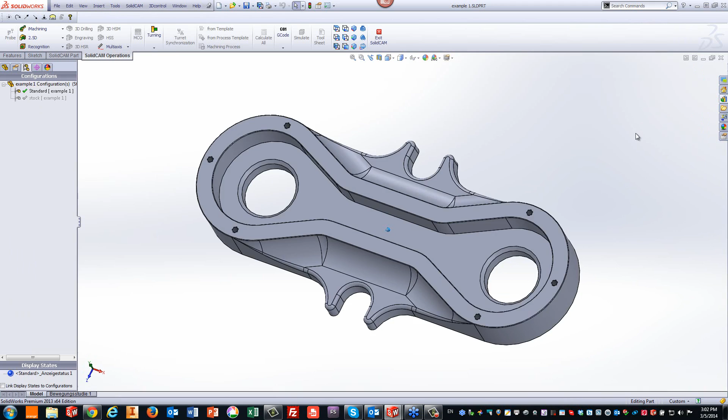Okay, so let's get started now with the webinar itself. As I said, we're going to be starting off with this part as shown on the screen. And as you can see, the part is basically one that has to be machined from one direction, only from the top over here. There's nothing to be really done on the side. But as you can see also, there's this area over here, which is really a simple pocket area of itself. And we have a regular profile on the outside. But you'll note that we have areas such as this over here, and also symmetrically on the other side as well, areas that need to be really done using HSS.

Now, besides the part itself, I'll also be using a fixture, or I should say I'll be using a vise that looks like this. This is the vise I'll be using, and I'll be putting that into my setup as we go further on in the part itself. Okay, so let's get the part back on our screen, and let's actually start our process. Now, I've created this part already with a configuration of stock as shown over here, and I actually like working with configuration stock rather than automatic stock, because this way I can make my vise associative to this stock itself.

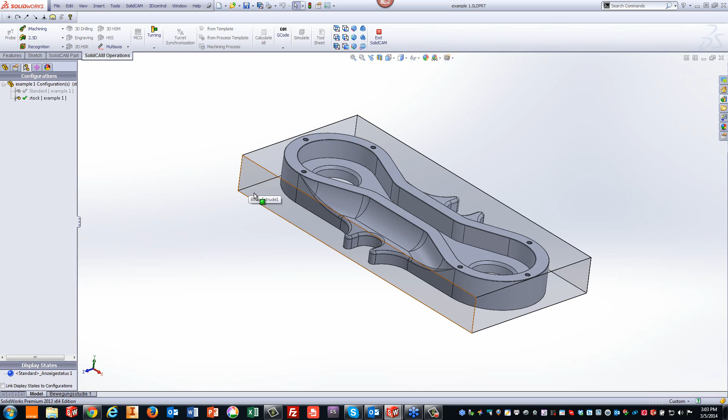Okay, let's start by going to SolidCAM, new milling. As you can see, we've opened up the windows, and this is the part that we'll be using. I'll just click on OK to start the process. I have my machine here, and I'll be creating a home position. In this particular case, I'm going to click on the top, and my home position, on purpose, I'm keeping at the corner of the part. Normally when I do the webinars, everyone always sees me put the home position in the middle. This time I want to actually put it at the end, to show that it can be done this way as well. Okay, my home position is over here. We're all set. That's all I need is just this one home position, and we're done with that.

Next thing I like to do is create my stock. So I'll go into stock. And since I have it as a 3D model, I'll just change my define by from box to 3D model. And I'll change my configuration to my stock, and just click on that to get my stock defined. If I click on show, you can see that that is my actual stock, as we'll see during our simulation. Okay, we're all set. My target I don't have to do because in my settings of SolidCAM, I have it set already that my target is done automatically. If I were to click on this, you'll see that my target has already been picked, so I don't really have to do anything over there.

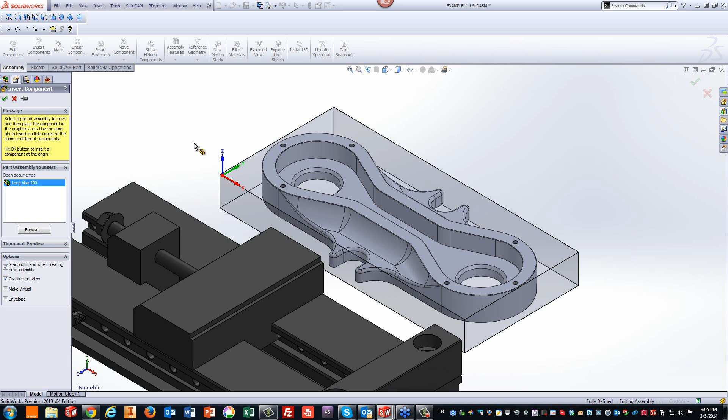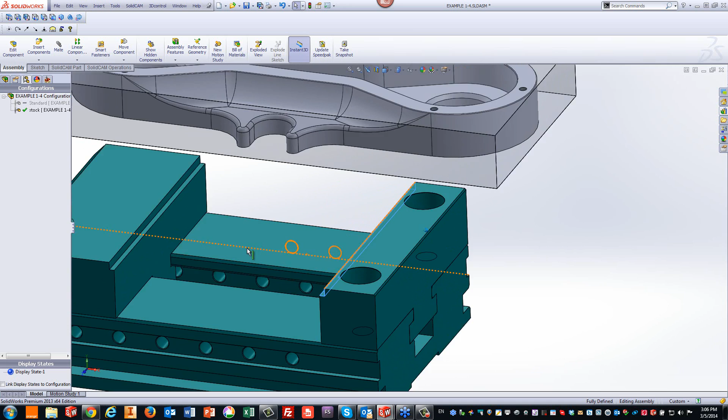Now, since my vise is already open, it appears in the list over here, and I'll just put it down over here. Now, in this particular case, I already did homework and I checked that the width of the stock itself is the same as the distance between this surface over here and this surface over here. They're both the same length. I did my homework and I checked it out.

And in case it wasn't, with this vise that I have over here, we just go into my tree, open up my vise, the entire assembly over here. In this particular case, in my mates, I have my measurement over here. All I had to do was change that and everything will be set exactly according to the width that I have over here. But this is all set, all good and well.

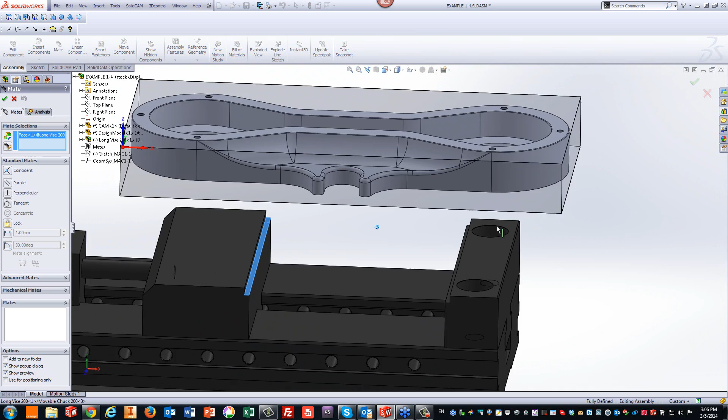Now let's just do some mates. I'll click on mate and I'll start off by clicking on the bottom surface over here where I want the stock to sit on, and I'll click on the bottom surface of the stock, and as you can see, it's coincident over there. Next, I'll click on this side of the stock together with this side of my vise, and that's coincident over there as well.

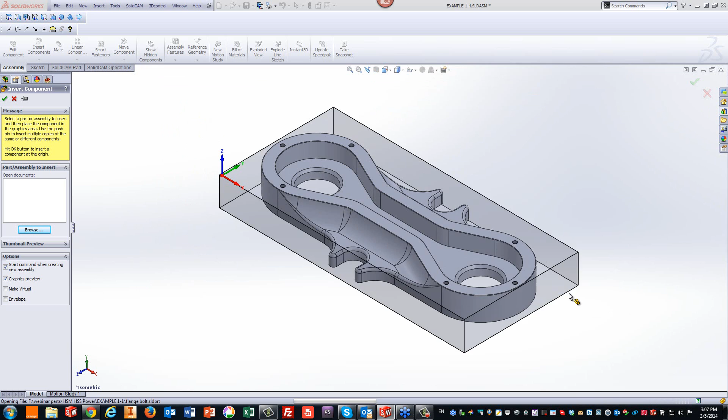Now, I'd like to have my vise, sorry, let's undo that. Let's do undo. There we go. Let's start this again. I made a little mistake of my own. I'm only human. Okay. Let's do file. Let's do mate. Sorry, my mistake again. There we go. Insert component. We'll do browse. I have my vise over here. All set. And we'll just go this quickly.

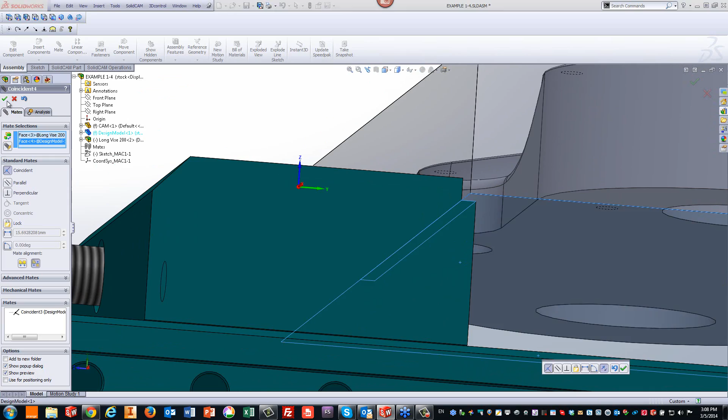I'll do my mating. This to this surface over here. I'll do this surface to this surface over here. And since I want this sitting in the middle, I like working where I have planes already in the middle of my part and in the middle of the vise. So all I have to do is match those planes.

So in this particular case, my long vise, I'll take my front surface as shown over here, and in my CAM part, in my design model, I'll take this surface, there we go, this surface which goes through the middle over there, and we're all set. We're all mated up as far as that goes.

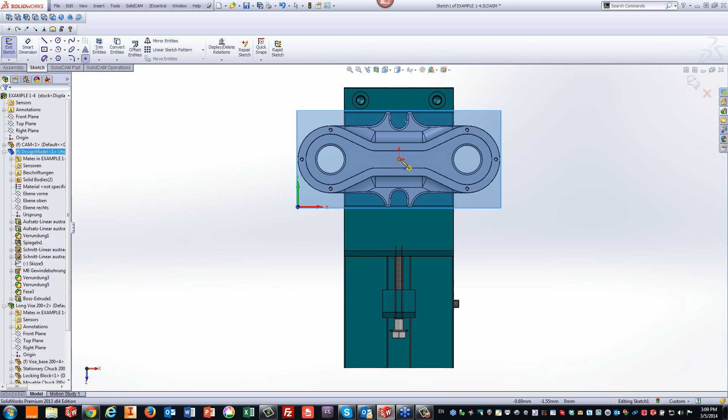Now, one more thing I like to do that'll help me out a little later on. Note my home position is in the corner over here. I'd like to actually make a little bit of a sketch over here. And in my sketch, I'll just put a point exactly in the middle of the part. And I'm going to use that for further reference a little later on.

Okay. Now, since I've mated my vise to my stock, I also want to have this in the same configuration, so this way when I turn off my stock configuration, I won't get any errors from SolidWorks as far as the vise itself goes. So I'll right click on my vise, go into configure components, and in my standard mode, I'm just going to suppress my vise. So now if I go into standard, you see we have no vise. With the stock there, the vise is available. Okay.

Now let's go and do our machine setup. Now we have to define our fixture first. Normally I would do this going to fixture and creating and defining the fixture, but we can also do this inside the option of machine setup. So I'll right click on operation, go directly to machine setup. And as you see over here, it says fixture and it says none. But if I click in this area and click on the arrow, I can actually go to define a fixture at this point over here.

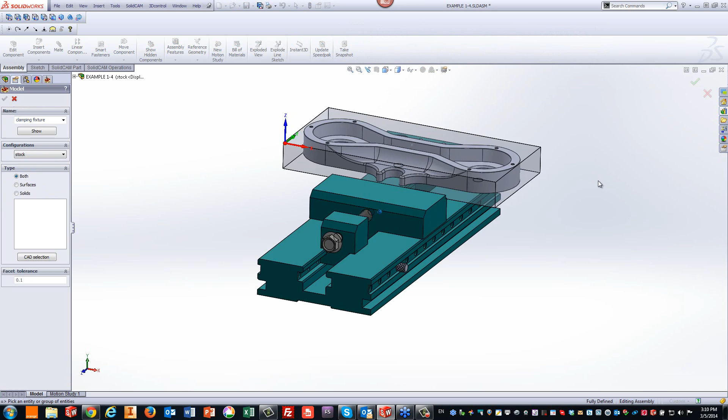Now, to define this fixture, since it's an assembly, it has several different components in it. Instead of clicking on each one of the components, I'm going to use the option of CAD selection to make it a little easier for me.

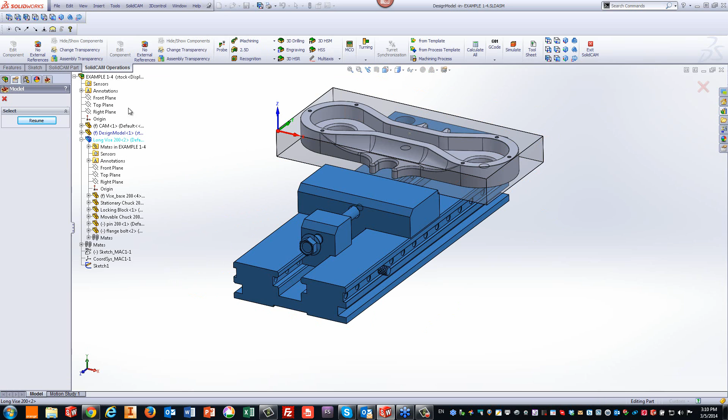In CAD selection, I'll go into my CAD tree and click on the vise itself, then click on resume, as if I picked the entire vise assembly. Note that all of the components are now listed in my fixture. If I click on show, you'll be able to see that everything was chosen, and we'll accept that.

Now what we have to do is set our X, Y, and Z towards the machine. X and Y cannot be 0 because 0 would make the home position exactly in the center of the machine, and I want the center of the part to be in the center. So remember, I created that little point exactly in the center of the part itself, and I'm going to use that to my advantage now.

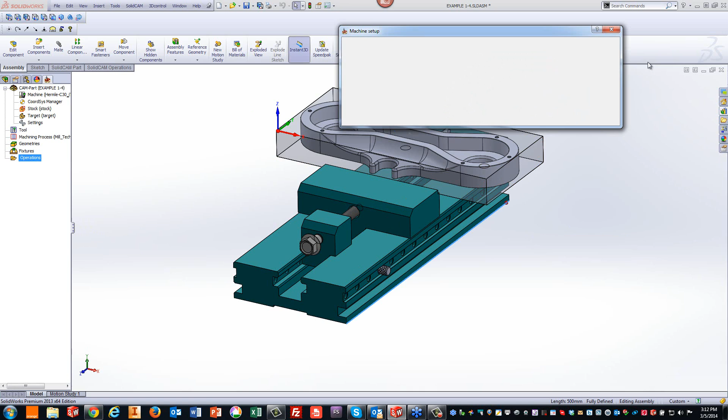I'll right click over here on X, and choose pick X, Y, Z. All I'll do is click on that point itself and accept that. So right now my X and Y are correct. I still need my Z, because my Z is really at the bottom. So I'll right click here, pick Z, and just pick on any edge of the bottom of the vise itself, and that's all set. As you can see, we get the dimensions that we need here automatically.

Okay, now I'm ready to start working. The first thing I'd like to do is a face mill operation along the top of the part itself. Remember the width of the stock itself is 174 millimeters.

So we're going to start by doing a SolidCAM operation of face. When I go into my geometry, and go to base geometry, since I'm using a model, I can click on the arrow and I have my stock here. That's exactly where I want my borders to be based on, my stock. Our geometry is done. Next tool.

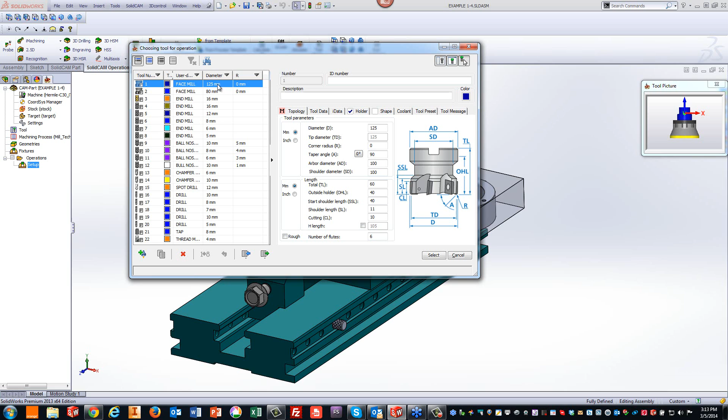Now, the way I like to work is that my machine is already attached to a tool table. So when I go into select, I have already a list of all different types of tools that I work with very often. In this case, I want to start off with a face mill. I'll choose the bigger face mill that I have, the 125 millimeter face mill, that's the biggest one I have. Okay, I'll click on select.

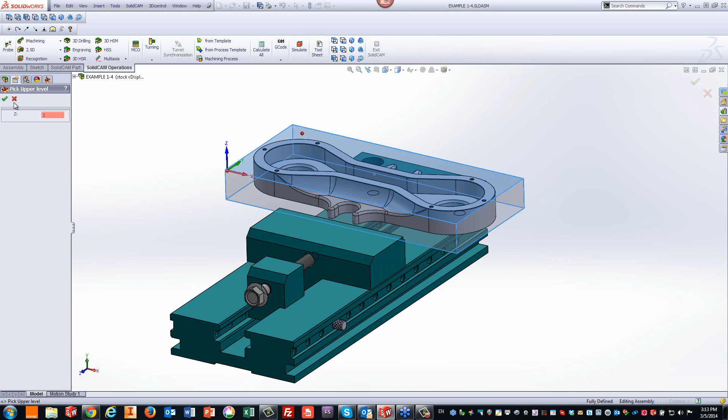Obviously, 125 millimeters is not big enough to do this in one pass, so we're going to be working on this in a hatch fashion over the part itself. Our levels: my upper level will be the top surface as shown over there, and my face depth will be up until this surface over here of the part. I'll just click on the corner, this way it's associative to the part itself.

Now let's go into our technology field. In our technology field, what we have here is as follows. First of all, we have hatch, which is the way I want to work. Now, we also have our floor offset. I'm going to actually leave a bit of a floor offset of 0.2 millimeters and do a finish. This way we have a nice smooth finish on the floor itself.

Next, we have our overlap. Now, I don't want to have a 30% overlap, that's kind of a large amount. If I go into value, all I really want to have is just a 10 millimeter overlap of the tool itself. That's fine. Now let's actually go into the parameters of hatch itself.

I'm going to leave everything the way it is except for one thing, my cutting direction. I would like to work one way over the part. Perfectly acceptable, that's the way I prefer. If you prefer a zigzag, it's fine, but I prefer one way, going always in one direction.

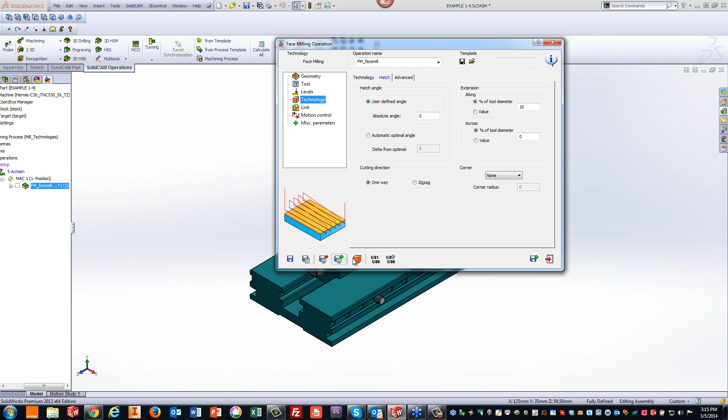Let's save that and run my simulation. Let me run my simulation at this moment, just this time, using machine simulation. The reason why I'm doing this right now in the machine simulation is just to show you that the way I did my machine setup, you'll actually see the fixture and part sitting exactly in the middle of the table itself, exactly where I needed to be.

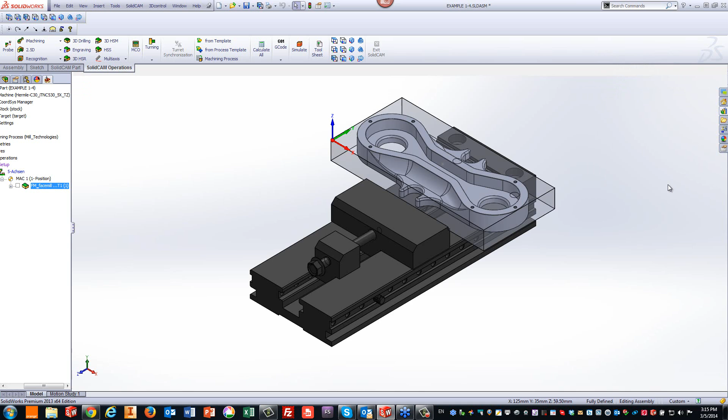All right, so we'll start our simulation. You can see the tool goes down one direction, goes back up, then goes down again in one direction, and now it finished off everything over here. Okay, that was my first operation. Now I'd like to continue on the part, and deal away with all of the excess material that's here.

Now let's basically do a rough cut. The quickest way for me to do it right now is by using HSR, and we'll see exactly the options I'm going to be using in order to do this in HSR.

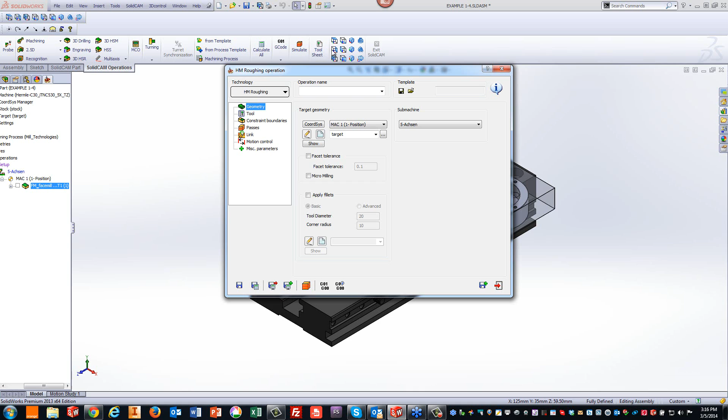So we'll do 3D HSR, click on that. I'm going to use the option of HM roughing. With HM roughing, this is actually probably the best way to do a part where you have both outside and inside areas, pocketed areas, and also cavities and core areas on that part itself.

Okay, so we have our target, our tool. I like to use a tool over here. Now, I have a whole list of all different types of tools, and sometimes it gets a little difficult to look at. So I'll just click on this area where the user defined tools are, get rid of everything, and all I want to see are just end mills. If I click OK, now we see the list of all the different end mills I have.

I actually want to start off with my 16 millimeter end mill. Note all of my tools have holders. I like to work making sure they have holders so we can see the simulation correctly. And I'll click on select.

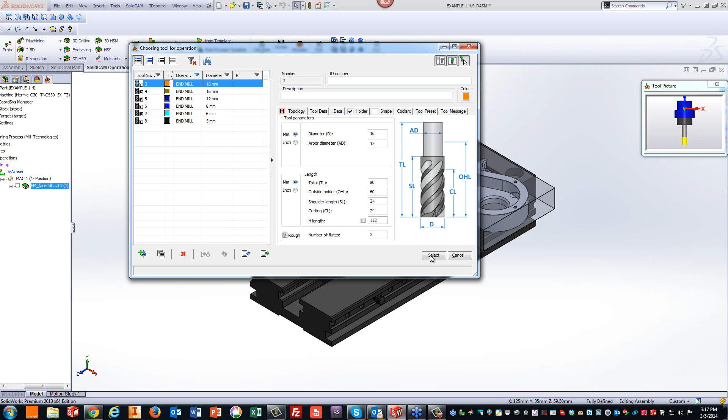Now I'll also click on calculate minimum tool length. What that will do is, after I do the calculation, it'll show me what's the minimum tool length I actually need for this operation. Right now, I'm out of the holder 60 millimeters. Then we can compare it to see if this is enough.

But let's continue now to my constraint boundaries. I'm going to do this automatically according to the auto-created box of stock model. I'll click on that, and I'm going to have my boundary tool relation not centered, but external, to make sure I actually go completely outside of the part itself.

Okay, next we have our passes. We'll have my wall offset. I'll leave that at 0.5 millimeters, same thing with my floor offset. And my step down, I'm going to have that every 3 millimeters going down on the part itself. As far as my step down type, I'm going to change it, instead of constant, to constant plus flats. What that will do is as follows.

I'm stepping down every 3 millimeters. If I have flat areas that fall in between those 3 millimeter step downs, it'll actually stop and do those flat areas as well. As we continue down, I'll be using the step over type HM spiral. This is exactly good for where we have both core and cavities in a single part.

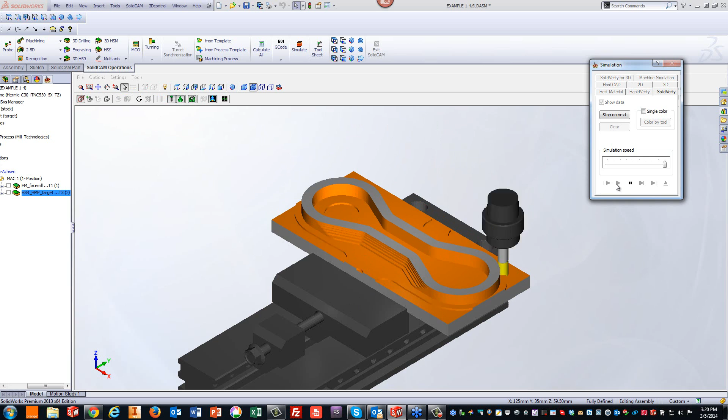Let's run our simulation, and let's do a solid verify simulation of the part itself. You can see the fixture, the vise, and the material itself. As you can see, it's clearing out that whole area in the middle, then from the outside going down to its next steps, and doing all of the roughing that I needed to be done.

Now, am I ready to do a finish cut on this? Not really, for the simple reason that if I look at these edges, I went down every 3 millimeters, which is good in these areas because I can use the bigger step downs. But in these areas over here, if I leave this for a finish cut, this is actually a little bit too much material left.

Now, I wasn't going to set this at 0.5 millimeters for the entire part because that would be a waste of time. So what I'll do is as follows.

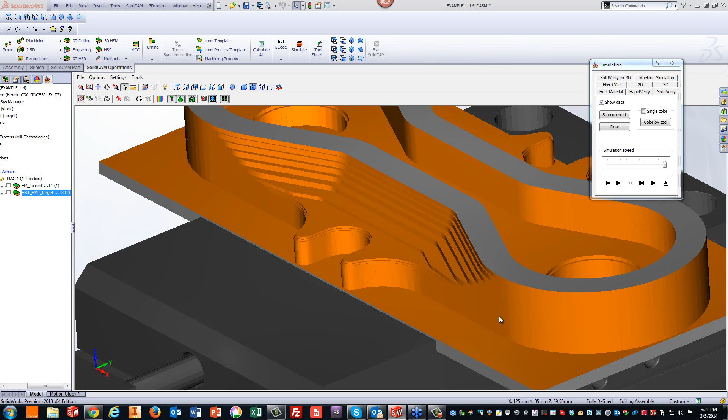I'll create a new operation by simply clicking on Save and Copy. So we have a new operation created, and in this operation I'll use rest roughing. The tool, I'll actually keep the exact same tool I used before.

Now, the constraint boundaries, keep it exactly the same way. The passes, I'll keep my wall offset at 0.5 millimeter, and I'll step down at 0.5 millimeters as well. Now note in my edit passes, it's already set automatically. That means it's automatically checking to see what material is left over to be machined.

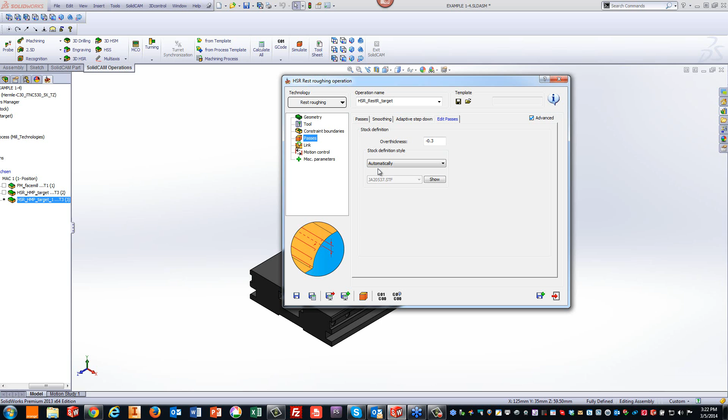If I were to click on Show over here, it'll actually show me what material is left over on my screen. You'll see that in a moment. And as you can see, that's the material that's left over to be cut.

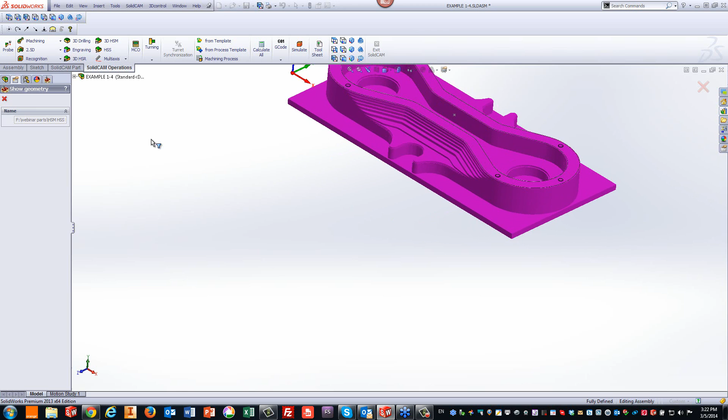My tool, like I said, is the exact same thing as before. Passes, links, everything is all set. Let's just do Save and Calculate. And as it does all the calculation over here.

Again, when we finish the calculation, we'll run our simulation, and what you'll see in this simulation is that only the material that has to be cut will be cut.

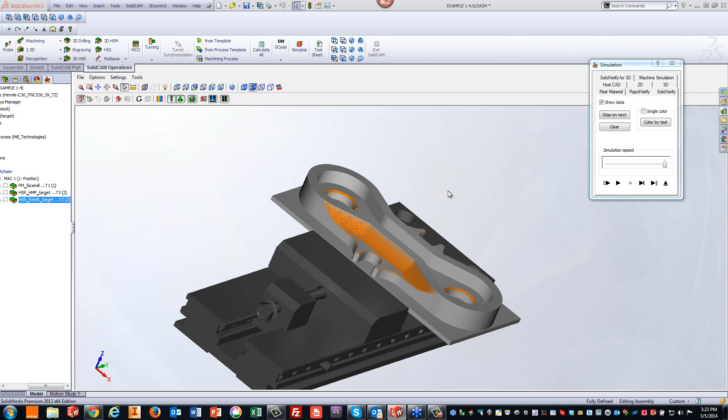Let's run our simulation. Solid verify. And as you see, it'll only work in the areas where it needs to work. None of the other areas will be touched. Just this area over here, the flip side over here, and these areas over here. Those are the only areas where this is being machined.

Okay, if I were to do this using my HostCAD simulation, let's put this in the middle. You can see the tool path is only being created in these areas over here and on those areas over here. Nothing around the part and nothing inside over here except on this small area as well.

Okay, now let's start with the finishing operations. Let me first start with the inside area over here. This area is just a simple pocket operation, so that's exactly what I'm going to do, a pocket operation, 2.5D pocket.

The geometry, just like any pocket, will be a closed chain over here. By the way, since I picked my geometry, the actual depth of the pocket will be set, as you'll see later, according to the first part of the chain that I picked. You'll see that in a moment.

Okay, the tool that I'm going to be using, again, let me select the tool. Let me change this from user defined over here, get rid of all of these, and I only want to see the end mills themselves. I'm going to use the second end mill that I have here, 16 millimeters, which I've set for a finishing tool. I'll click on select, and my levels.

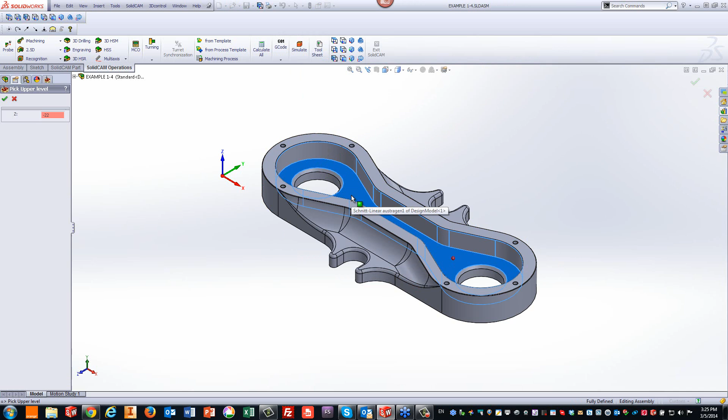I'm going to make a couple of changes. I'm going to have my upper level on that surface over there. Since this entire area is already all machined out, and I have only 0.5 millimeter left on the floor, I'm just going to keep that as my upper level. So my pocket depth is actually 0. If I was just to click on that surface also, you'd see that my pocket depth is actually 0.

Now, it'll come down safety distance 2 millimeters before that, no problem at all. In our technology, we have our wall offset. Let's put it in a wall offset of 0.2 millimeters, and I'm going to click on Finish Wall.

The reason why I'm doing that is very simple. When I do that, one, I can have my compensation on, and two, when I go into my link, I have my lead in available as well. So it'll lead in to the wall the way I want it to, say an arc, and have my lead out work the exact same way.

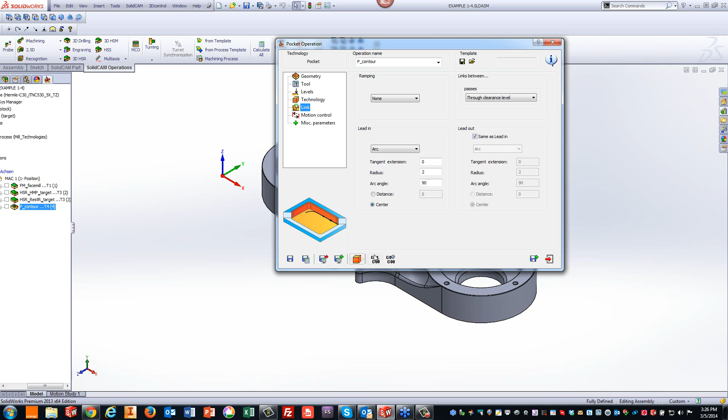Let's run my simulation on the part itself. Let me do it running Solid Verify. Okay, we go down over here, and as you can see, it's working on the floor itself. Goes across to the other side.

Let me actually do this a little slower, from the beginning. Use the top view over here if I can. Let me stop it for a moment. Get rid of the holder so we can actually see the tool, and I want to do this one step at a time. And as you can see, it's going around.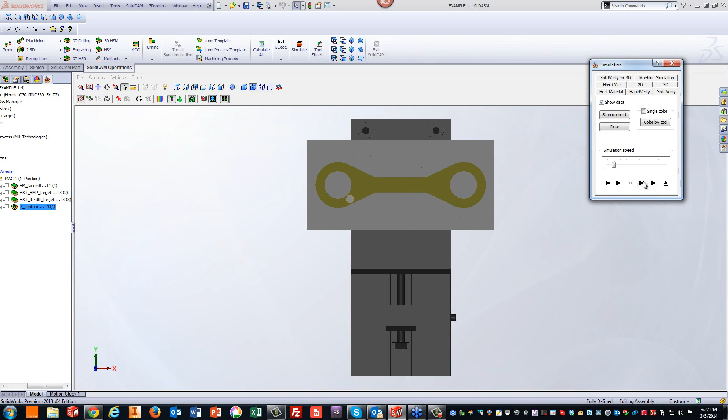Now it finished the wall to its clear offset, to its offset for the rough, and now it's actually going to arc in to the wall itself. And when the finish is coming around, it's going to arc out of the wall itself. So we have our approach, lead in, and lead out. Next,

we have our outside. So let's do our profile operation for the outside. So we'll start again, 2.5D profile. We'll create our geometry. What I'm basically showing you on this part is that most of this part, in this particular case, as far as the outside and the inside goes, can be done using your regular 2.5D operations, which is exactly what I'm doing over here. I'm going to use the exact same tool I used last time. So let me go to my tools, select.

And if I don't remember exactly what it was, it makes it easier if I can just use tool used in operations. Tool used in operations, I see all the tools that I've used, and picking that one is exactly what I want to do. My levels, you see I have my upper level, my profile depth, everything is over here. I can actually pick it again from the surface if I want to make it associative to the part itself. Pick that corner over there. If I want to go a touch past it, I'll go minus 0.5 millimeters.

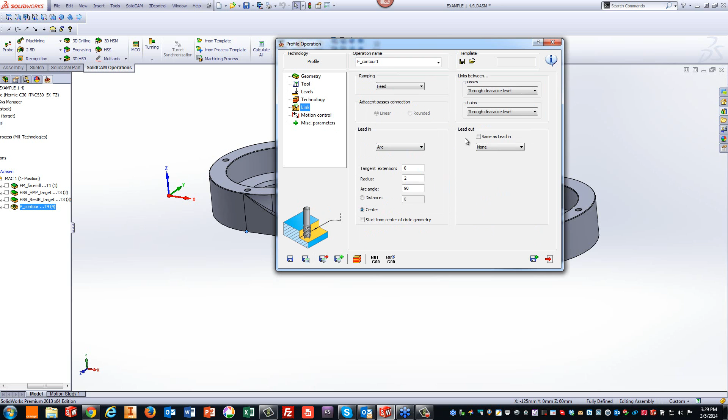And in our technology, I'm just going to do a finish cut. But since we're going down a total of 35 millimeters, and the tool that I have has a cutting length of only 24 millimeters, I'm going to have a step down of, say, every 18 millimeters. Now, in my links, I'm going to approach with an arc, lead out with an arc, and if we go through our simulation, you'll see that the tool will go down around the part and finish off the outside.

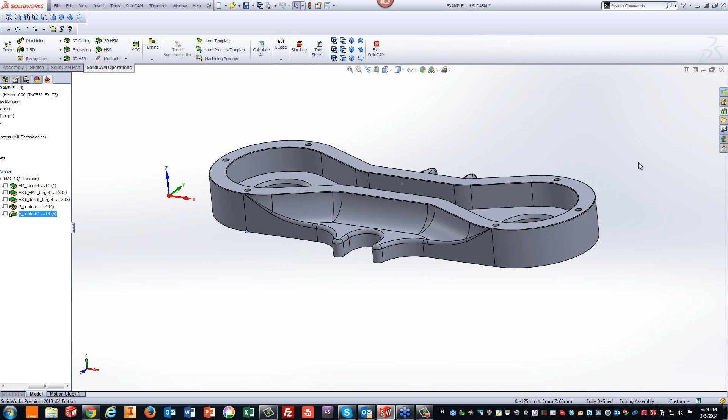Okay, now let me actually go back to the part itself. And before I start my HSS operations working on these areas over here, let me look at this edge over here. Now, this edge over here is an actual fillet. We have this fillet over here, and we also have the exact same fillet on the outside over here. Now, honestly, I'm not going to use an HSS operation for this. I can actually use a tool that has the fillet that I need. In this particular case, the fillet that I need is 0.5 millimeters. So I'm going to use a tool that already has that radius. In other words, I'm going to be using a shape tool.

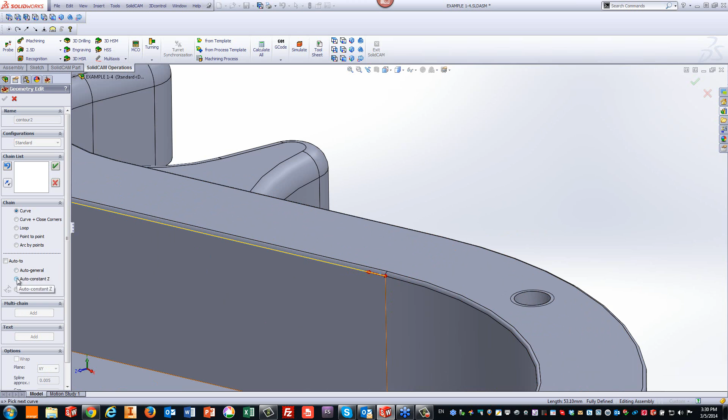So let's start my next operation, and I'm going to use a profile operation again. Now in this profile operation, note when I choose my geometry, I'm going to choose the very bottom, in other words, the very outside part of the radius itself, the lower part, the small area of the radius. I'll do auto constant Z. So we have my entire geometry over there. You know what? I'm going to add to this as well. Starting from this edge over here, I'll choose this edge as well. Go around the part. And just choose this edge over there, finishing that off.

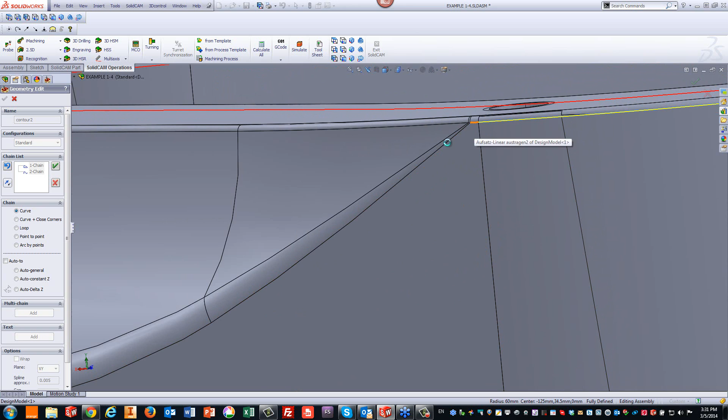The reason why I'm not going further with this edge is because this surface over there is actually not straight down, so I don't want to use it with this kind of a tool. That I'm going to use HSS for already. Let's do the same thing on the other side over here as well. Add a third geometry, or a third chain. We'll start over here, adding that chain over there, and there we go. And we'll go back to this side over here, click on that edge, and accept that as well. Okay, next we need our tool.

Now, as I said, I'm going to be using a shape tool, which I don't have here at all. So I'm actually going to create a new tool in this particular case. I'll go to add milling, I'll use a regular end mill. Now, before I deal with the actual diameter of the tool, let me choose my shape tool. I'll go to shape, and I have here tools in my table already for fillets. If I open this up, you can see I have 3 different fillet tools already defined over here. R2, R3, R5. I don't have R0.5. So what I'll do is, instead of creating a new tool now, I'll just choose this one over here, R2, for example.

Now, once I've chosen it, it's inside this particular tool table. I'll go to Shape Edit. And in my Edit area, you can see we were talking about the torus over here, which is our first area over here. We have our top diameter over here of 10 millimeters, and then we have our radius. I'm just going to change my radius to 0.5, and note the moment I do that, my bottom diameter will be 9 millimeters over there.

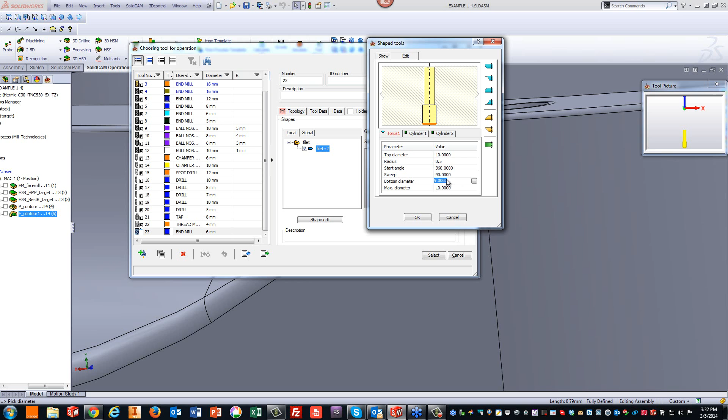Okay, that's the tool I want to use. Everything's fine over there. Now let's go into my topology. Now, what's the diameter that I'm going to be putting in over here? Well, the actual diameter I'm going to write down over here is 9 millimeters, what the bottom of that radius is. The simple reason is that since I'm working with the outside of this nose on this edge over there, I need the 9 millimeter diameter of the tool to get to that edge over there. So that's the value I'm putting in over here.

As far as my cutting length, I know my tool, I'm going to have that as 15, together with my shoulder length as 15 as well. And I'll have an outside my holder of, let's say, 30 millimeters. I'll add a holder. I like working with holders, so I'll add a holder that I have over here. And that is my tool over there that I'm going to be using. You can actually see the tool if I try to get it a little closer here. You can see that there is the actual tool that I will be using.

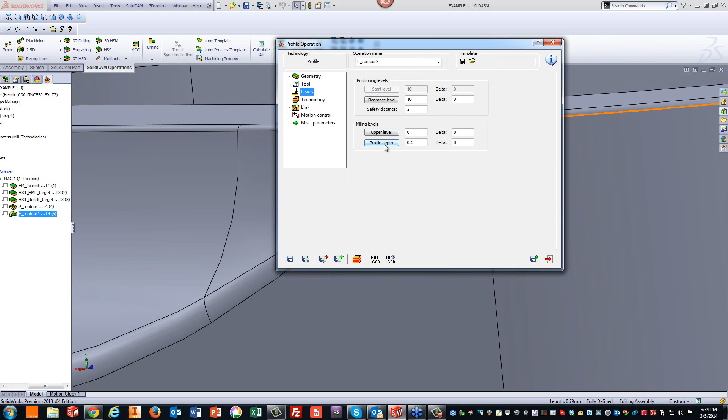Okay, next, my levels. I have my upper level, my profile depth. Note it's already at 0.5 because I picked the edge again. I picked it from the bottom edge, which says a depth of 0.5. That's perfect. Technology, I'm just going to do a finish cut, one step, and my link, I'm going to do a link this time with a normal approach of 2 millimeters, making sure that when it gets to this area over here, it doesn't touch any of these areas by arcing out.

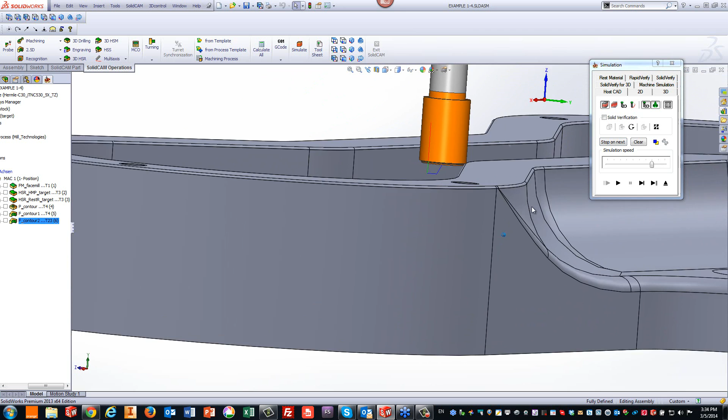Okay, let's run my simulation on the part itself, and I'll do this actually using my regular host CAD, and we'll take a look at the tool itself. As the tool goes down, and let me zoom into this area itself, you'll see that the tool now is sitting exactly on that radius as shown over there. Exactly the way it should be. And that's actually going to give me the shape of the radius that I need.

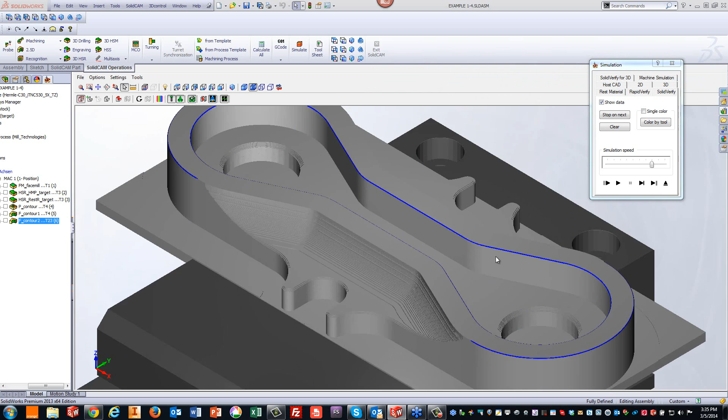Okay, now that we've done that, actually let me do this while I'm here. Let me already do this using Solid Verify. You can see my tool go down, give me that radius that I need over there, as well as these edges over here. Okay, now I actually want to finish the milling of the part itself. To do that, I have to start working in these areas over here, and on this area over here, as well as these radiuses down here. For that, I'm going to actually use HSS.

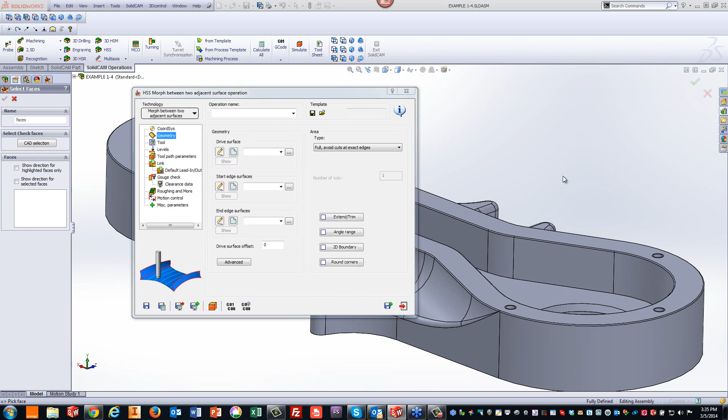Okay, so let's start from the beginning of the HSS. My first HSS operation, I'll go into HSS. And I'm going to use the option of morph between two adjacent surfaces. What I'd like to do in this particular operation is as follows. My drive surfaces is going to be all the surface between here up until this area down over here. So I'll just go ahead and pick my surfaces. Let me zoom in over here. So I'll get that little one over there as well, not to forget that one.

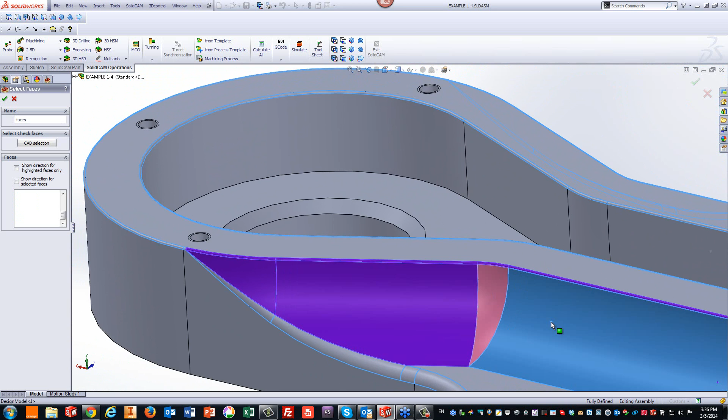And let me just go drive along this surface over here. Get this radius over here. Pick all the surfaces that I need to work on, including this one over here, this one over there. Go further down over here. Choose that surface. And let's not forget that little one over there. Let's continue on now over here with this surface over here, this one, this one, this one, this one, and these surfaces. Those are the surfaces I want to actually machine right now. Now, let's click on Show to make sure I have all the surfaces I want to work on.

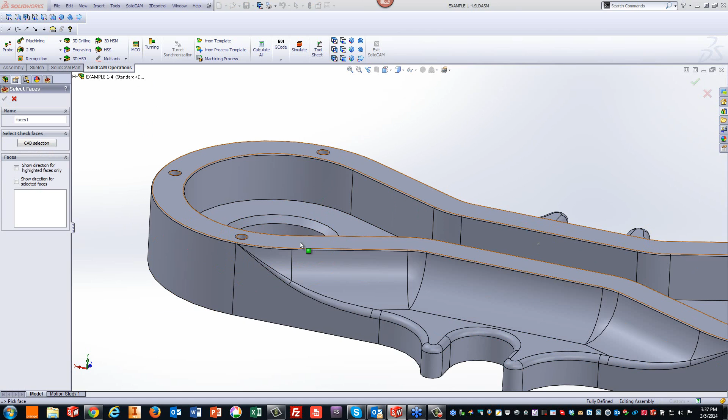And now my start edge surface is going to be simply picking the very top surface over here. The edges of this surface are actually touching the entire top of that area. That's exactly all I have to do. Just pick that one. Now my end edge surfaces are going to be as follows. I'll choose this one, because that's the edge it's working on over there. Go to the other side, choose this one and this one. Sorry, didn't choose it. There we go. Those are the surfaces that define my end edge.

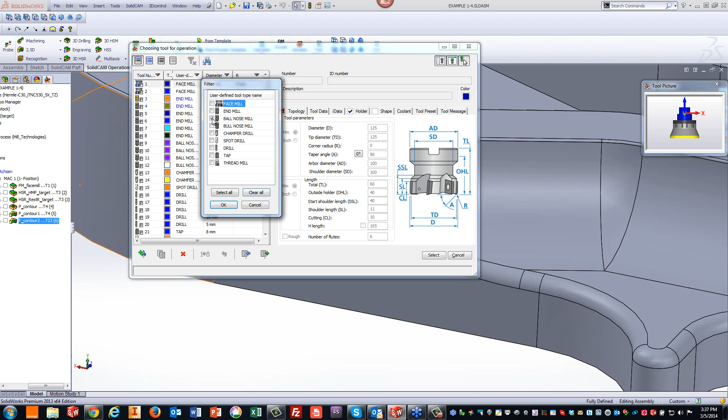Okay, now as far as my tool goes, the tool I like to use is a ball end mill. So let me go again over here and clear all and just pick ball nose mill. I'll accept that. And I'll use the 10 millimeter ball nose that I have over here. That's fine.

Let me go to my toolpath parameters, and I'm going to set my maximum step over at 0.2 millimeters. Note, I have a very small scallop over here. Okay, let me actually just run my calculation exactly the way it is, and then we'll take a look at the simulation the moment the calculation is done. Now, what you'll also see is how the scallop actually affects the tool path itself. You'll see that in a moment.

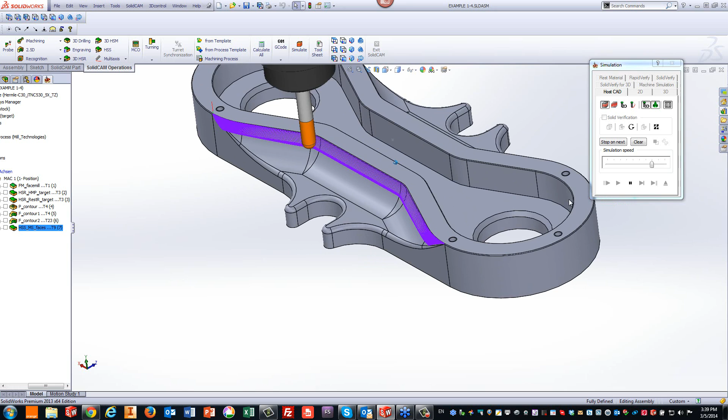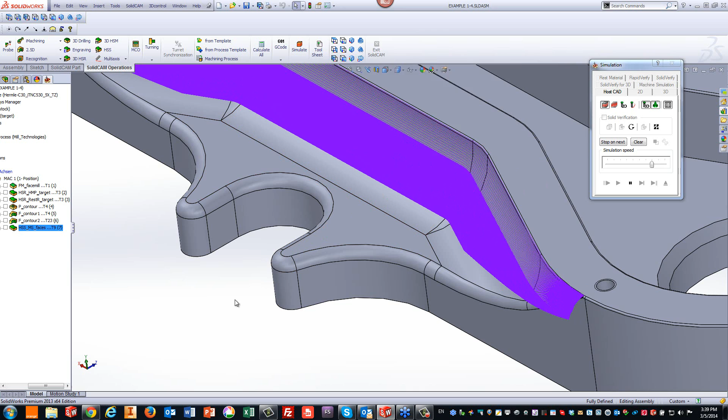Okay, let me go run my simulation, and we'll do this over here using the regular host CAD. You'll see that my simulation is over here. This is the side I picked to do it on. And note, you can see these areas over here. The steps are further apart than they are over here. That's because this is a flatter area over here, a steeper area over here. And the tool can actually give you the scallop that we need with larger steps. As it gets to a shallower area, it needs more steps to give you the scallop that's needed. Okay, we'll finish off this area over here.

Now, exactly what I wanted it to do, but note I really need this not only on one side, I need this on the other side here as well. This part, the way I have it, is actually symmetric. So I want to do this on the other side as well. Now I'm not going to create another operation. Instead, I'm going to continue within my HSS, go to the option we have, roughing and more. In roughing and more, we have an option here called rotate and translate. I'm going to activate it.

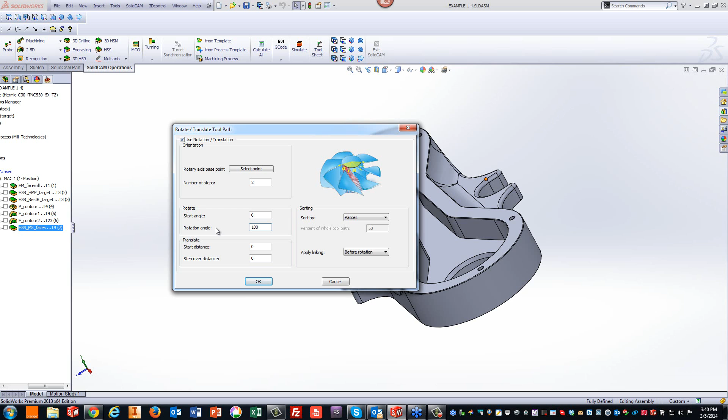I'm going to say number of steps, total of 2, and then rotate it at 180 degrees. Now, I also have to have it rotate around the center of the part, not around my home position. So we have here rotary axis base point. And remember that point I created in the very beginning? Well, I'm going to use that to my advantage over here now. I have that point over here. I'll just click on it. So now it'll rotate exactly around that point.

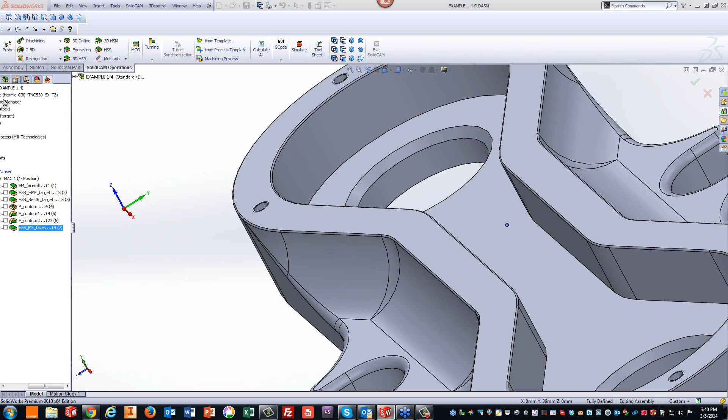Let's actually run my simulation. Note the calculation now will be a lot quicker since the calculation was already done beforehand, as far as this side over here. So just calculating the rotation itself. Let's take a look at the simulation. And as you see the simulation, it'll work on the first side as shown over here. And then when it finishes that side, it'll go over to the other side, doing the exact same thing. So I was able to do that without having to create another operation.

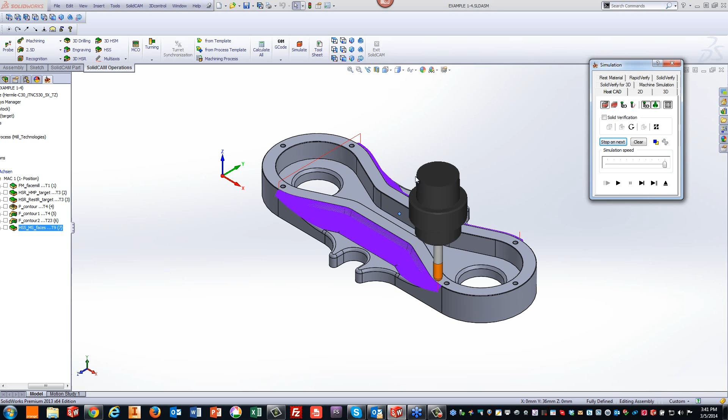Now, I'd like to continue on now with these areas over here. I want to work on this surface over here, and the same thing on the flip side as well. So all I'm going to do is do save and copy. Now when I have save and copy, my roughing and more is still here exactly the way it is. I'm going to go to my morph between adjacent surfaces and change that to parallel to curves. In this particular case, I'd like to work on this surface over here, and I'd like to work parallel to this curve over here. Parallel to that. We'll accept that.

My tool, I'm going to keep the same tool. My levels, nothing to do over there. My toolpath parameters, I'm going to keep it the exact same way. And in my link, since I already know that I have a gap in my toolpath over here, I already go into my links area, and in my large gaps, I'll change that to direct. And also my slices, I'm just going to change it to blend at the very end, because there are areas where it's further away as it goes into the part itself.

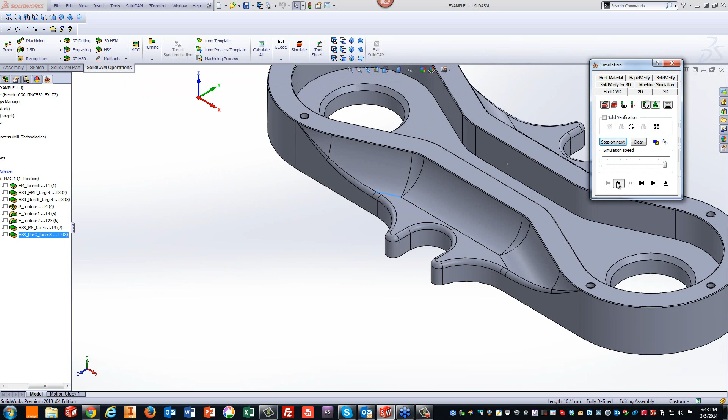Let's take a look at the simulation after I run the calculation, and you'll see, there we go. You see that it does this side over here with the gaps. It actually goes directly to the other side, and since I have my rotate still there, it does both sides, even though I only defined one side over here. Now let's continue on with this part itself.

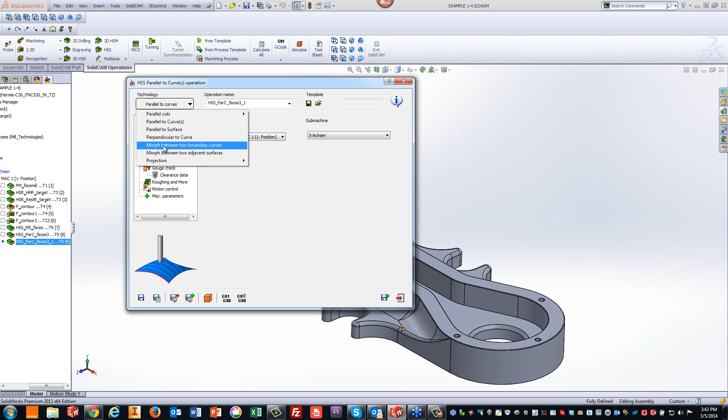And again, I'll do save and copy because I still want to do this bottom area over there. So in that case, I'm going to just use the option of morph between two boundary curves. My geometry, we'll choose a new geometry over here using this surface, this one over here, this surface over there, as well as this surface around over there, this one, that one. Just pick all the surfaces that I want to machine.

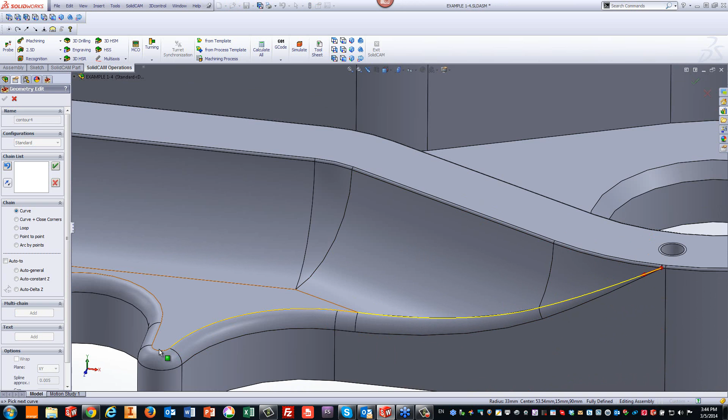Click on that surface, and one more surface over here. Those are the surfaces I want to use. We're okay with that. My start edge will be from this edge over here, going around on this part over here, grabbing all the edges as shown over here, and completing the choosing of all the edges that I need over here, including this one, that one over there, and I do have one more edge that I still need over there.

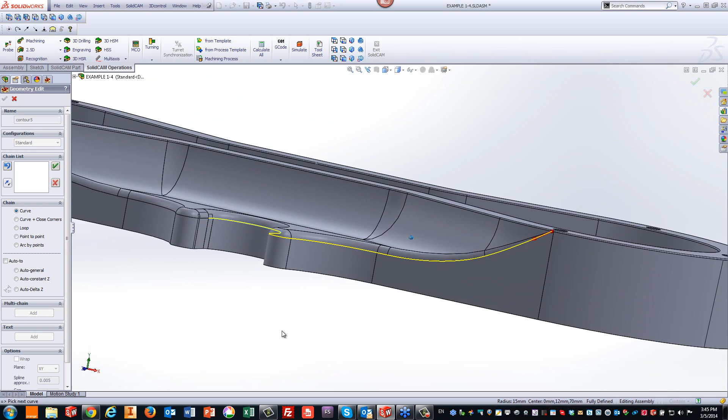Okay, that's my start edge, and the bottom edge, my end edge, will actually be the very bottom of that. So go over here and choose this edge over here, basically doing just about the same thing I did at the top, except now we're choosing the bottom one over here instead. We'll continue on down, choosing all the edges that we need over here, as shown, and finishing off by picking this last edge over there. We'll accept that.

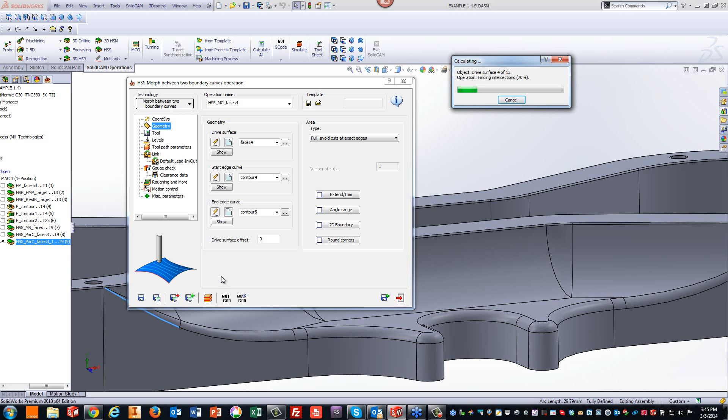And all I'm going to do now is run my calculation. Run my simulation, and you'll see that we're getting the exact toolpath that we need on this edge. And again, we're getting it on the other side. So basically, I've finished machining my part. There's only one thing left to do. I still have to do the holes on top over here as well. So I went this far, so let me go now all the way to the end and do the rest of the machining on the surface itself.

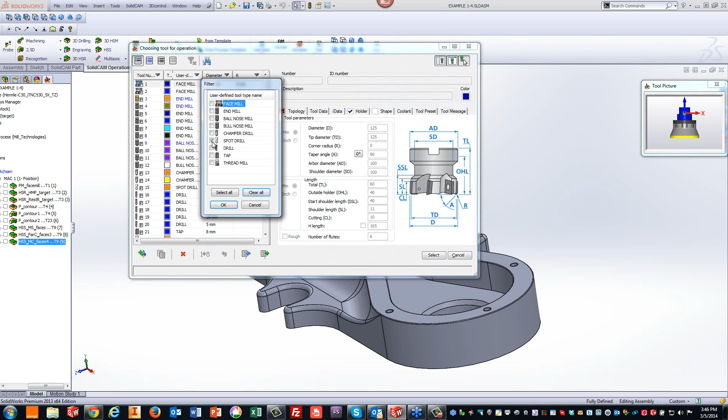Okay, so we'll continue with my 2.5D operation. We'll choose my drilling operation, the geometry. I'll just click on the top surface over here, so it picks all of those holes over there. Now the holes that I'm going to be drilling actually are an M6 tap. So the first tool I'm going to be using will be a spot drill. I can go over here and just clear all and just show my spot drill over here, which is fine. 12 millimeter spot drill is fine.

My levels, my upper level is 0, and my drill depth, I'm going to actually have my drill depth not picking from the part itself, but instead I'm just going to write in a value of 0.2 millimeters to give me a little bit of a chamfer. Now, how do I control the chamfer diameter? Just by telling it what's the diameter value that I want my tool to get to at the 0.2 depth. Since it's M6, I'm going to put that at 6 millimeters. Run my simulation. Let's actually do my solid verify simulation.

Actually, it's doing calculation of these areas because I didn't machine that. So just give it a moment. And what we'll actually see later on is that when we finish drilling these holes, including the taps, you'll see a little chamfer left over at the very top where the holes are, because I'm going 0.2 millimeters. My 6 millimeter diameter of that tool is going 0.2 millimeters into the part itself. So we'll have a little bit of a chamfer on those edges.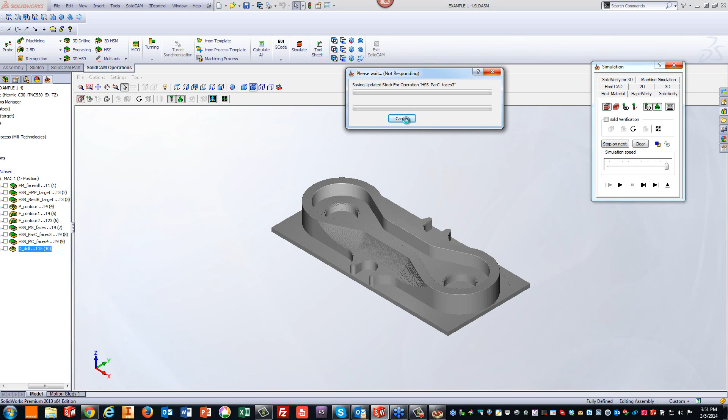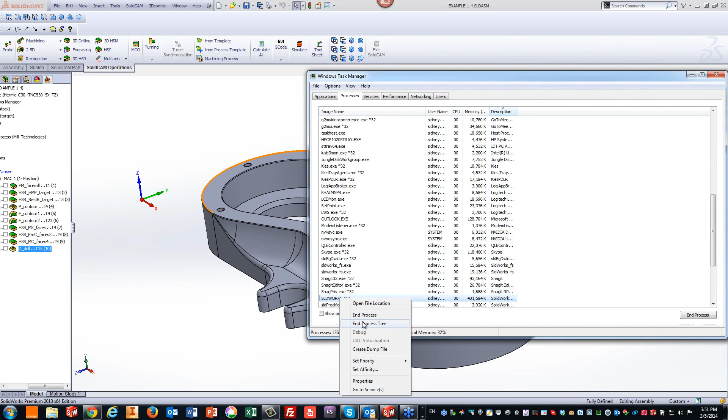Okay, let me finish the calculation over here. It's almost finished over here. I shouldn't have done that, but all right, I did it. We're almost set. Okay, we just have another moment and we're almost done over here. Okay, one more moment. I see it's almost finishing. Okay, just another moment. Okay, we're almost done.

Okay, there's some other questions over here. Again, you asked me about the tool. The tool will crash if you let it go, but it will let you know that it's crashing. Okay, you can make your changes if you want, but the tool will crash.

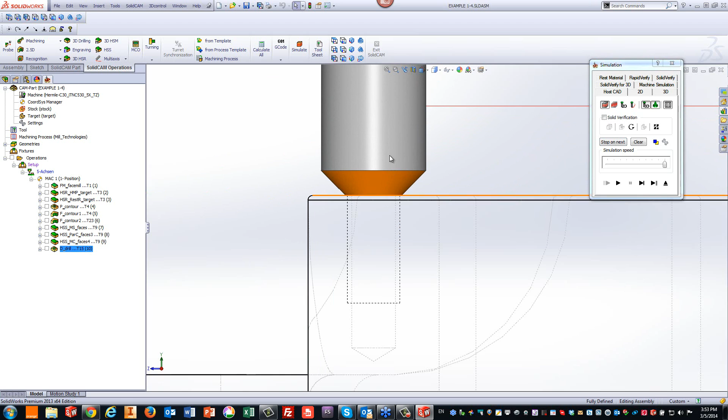Okay, let's go back to the part itself. Let me go into here and run my simulation. I'm not going to do the whole entire simulation this time. I'm just going to show you the tool actually going down into the part itself. And you can see it's going down. If I put this on the side view, you can see it's going down exactly to where it needs to go down. Let's actually do this in the wireframe so you can see it a little better. Here we go. You can see it's actually going down up until the depth that it needs to. Okay, let's put this back over here and finish the simulation.

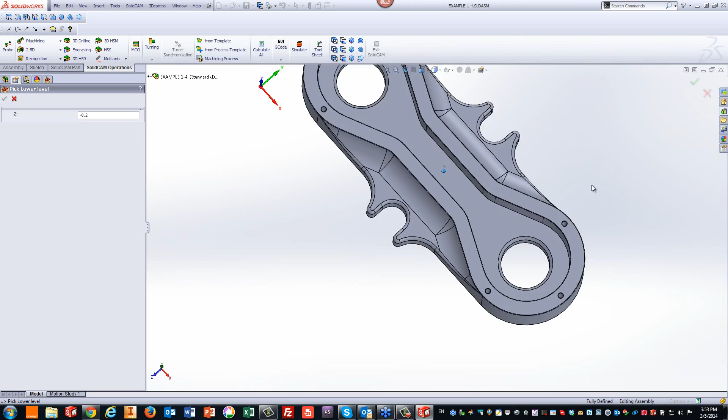And that's all done. My next operation over here, we'll just do save and copy. I'll choose the proper tool that I need over here. In this particular case, I'm going to use a drill, a 5mm drill. Again, I have my levels. This time, the drill depth I'm going to set all the way down to the very bottom of the hole itself. If I look into the hole, I see the actual tip of the hole over there. I'll just click on it, and I'm going to change my depth type to cutter tip.

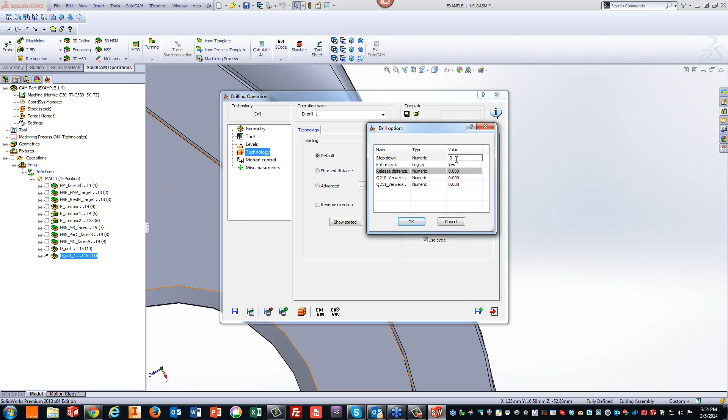Now, my technology, of course, I can choose any type. If I want to use pecking, I can use the step down, let's say every 3mm. Let's run my simulation. And you see that the tool will go down and it's pecking into the hole itself, drilling out each and every one of the holes. And last, of course, we need to do a tapping operation. So we'll do save and copy.

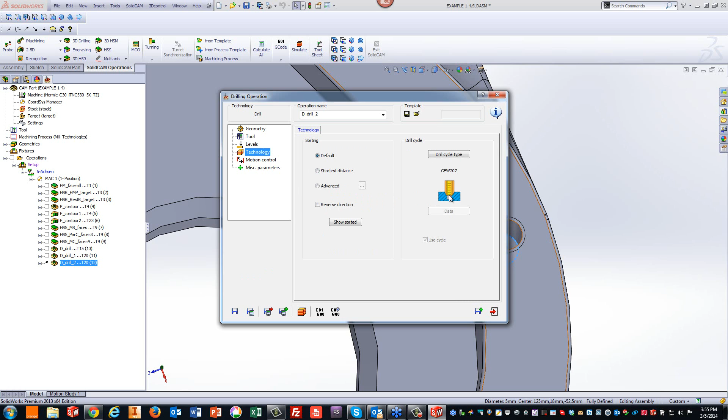I'll just change my tool. In this particular case, I have a tap here already, but this is not the right tap. So I can do a copy of this, which I just did. I'm going to change this to a 6 millimeter M6 with a 1 millimeter pitch. I'll change my tip diameter to 4 millimeters. Just keep that exactly the way it is. And as far as my levels go, I'm going to change my drill depth to go not to the tip of the part, but rather only up until the circle over here, the very bottom of the full diameter. Note when I go into my technology, it's automatically set at tapping already. Run my simulation. You can see that the tap will go into each hole around the part exactly the way it's supposed to.

Okay, basically here I've now finished the entire part. And that's basically it. So what we saw in this is we set up the entire part, including the fixture. We did HSR to take care of all the excess roughing material that we had on the part. Most of the part in the pocket area and the very outside was done using regular 2.5D operations. We even did a shape tool to do this area using the profile operation, and we finished this off using HSS to get those areas that were not able to be done using the 2.5D operations.

There are some more questions. Is there any possibility to choose the whole chain, edge, start and end continuous, instead of choosing each one separately?

In this particular case, sometimes with the simple way of doing it, you can't do that. However, we are working on a new option for creating chains that could completely revolutionize it, allowing us to pick chains a lot easier than we do now. Let me go into the operation and see if I can do this correctly. I'll go back into this HSS operation, look at my geometries, and pick this geometry a little differently. Let me see if it works.

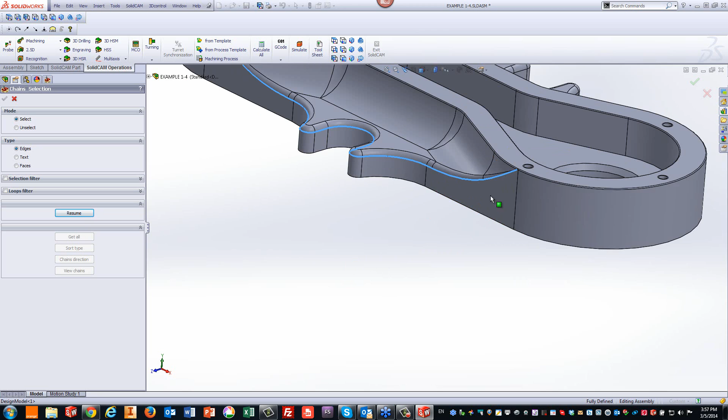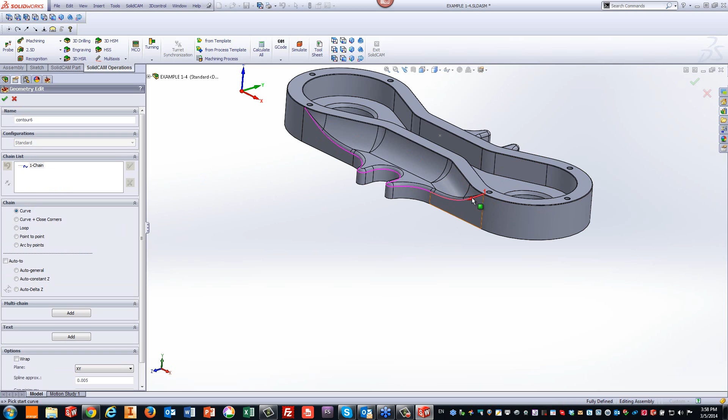I'm going to go to what we call multi-chain, and use the option of CAD selection. If I right-click on this edge, I can say select tangency. In this case, everything was tangent, so it allowed me to do it. If I do resume, I have my entire chain without picking each one individually. So that can be done as well, but this was on the condition that all of these were tangent. Even though it was not all on the same level, I was still able to choose it this way.

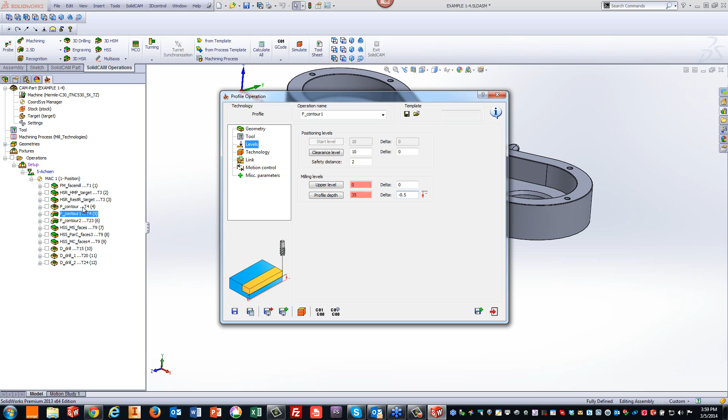That's true, I can do the same thing with my HSR—go a little further down, it's not a problem at all. However, if you crash into the fixture, it will crash into it, but it will let you know. In fact, I'll do exactly what you asked—I'm going to go down a delta of minus 3 millimeters, which I know will go into the fixture itself.

Remember I told you about going past the depth? It tells me the depth is below the coordinate system's lower level—it warns me I'm going past the depth. I can continue, no problem, it's up to me. I'm letting it go past the depth.

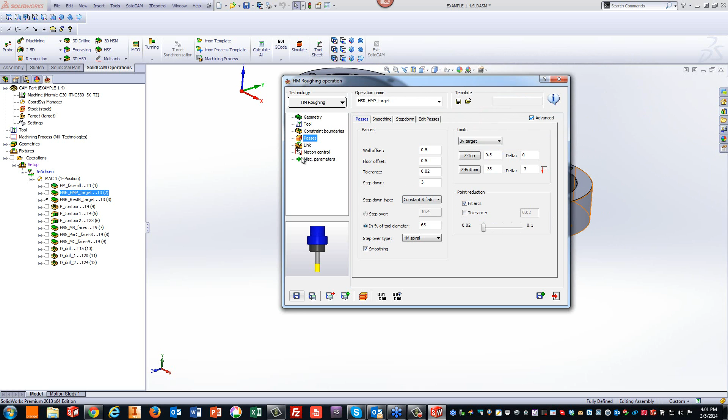Now, remember the fixture is not part of the part yet. Let me go into the simulation and do solid verify.

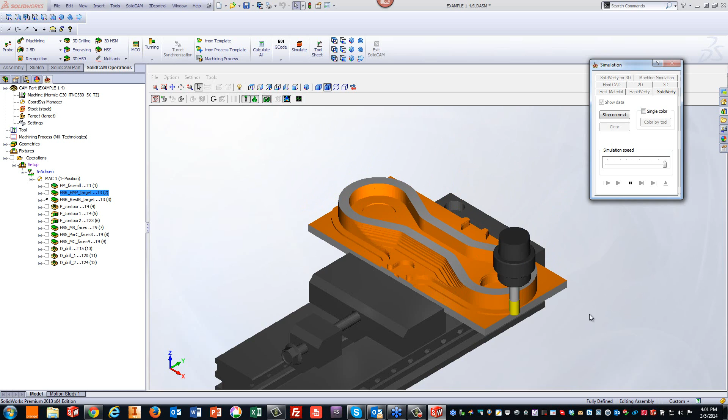Now, what we are working on—there we go, it's crashed into the thing, but it lets us know we crashed. We are also working on adding a feature to recognize the fixture and avoid crashing into it. It's not there yet, but we're working on that as well.

In HSS, you can tell it to avoid that, or you can just continue, but you'll see the crash. It did crash in there, but it did warn you about it.